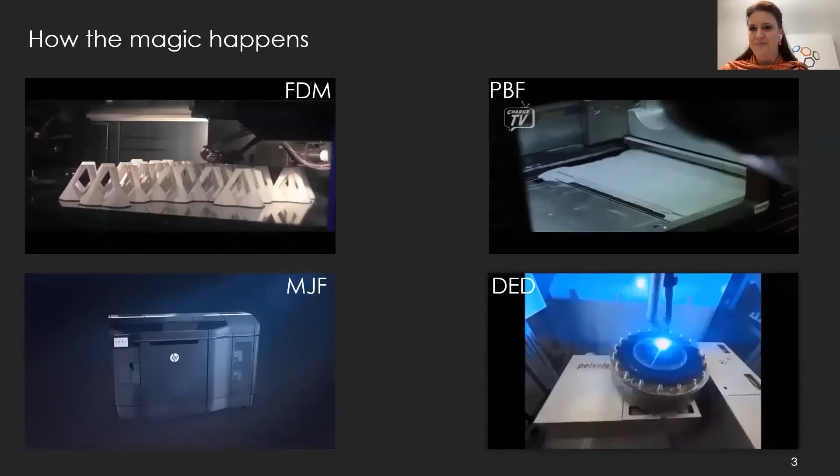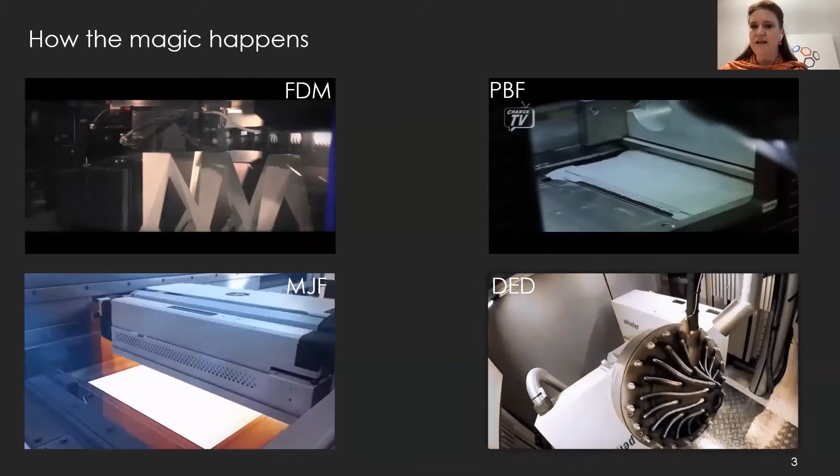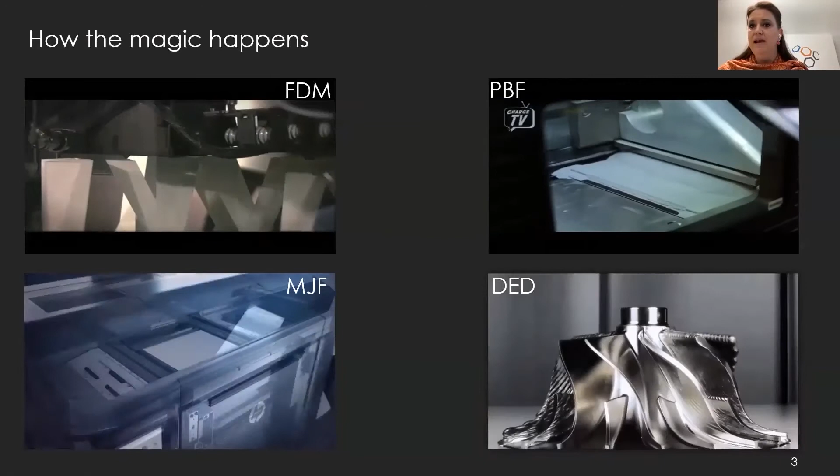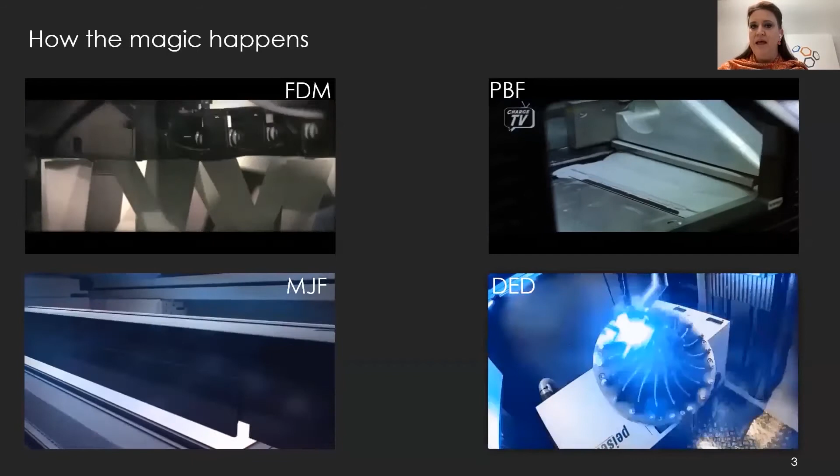So what you can see here are the most common ones which are used, for instance, in mobility. You have the FDM technology - that is what you for sure will know, you might have seen that. Those are also the desktop printers which can print plastic parts made from a plastic cable which is heated. You always, in all those technologies, have a layer-by-layer structure, so you can produce things absolutely differently compared to former technologies like, for instance, casting. What you can see here are just some examples, but it gives you a very big freedom of design.

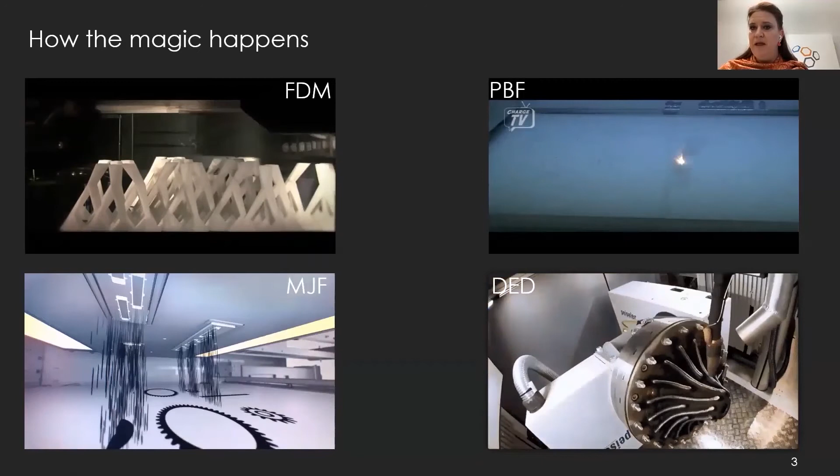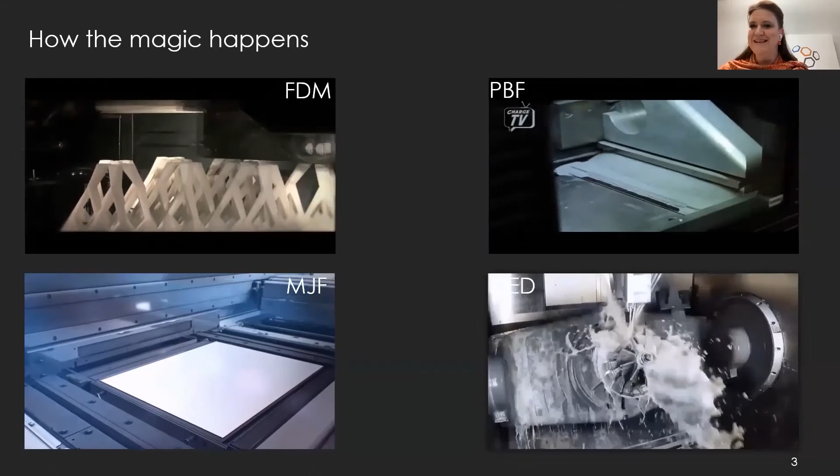What you can see next to it, the PBF, is the abbreviation for Powder Bed Fusion. That's a technology which is used with powders, as the name already says. And there you can see it - you have a very thin layer, just one hair's thickness thick.

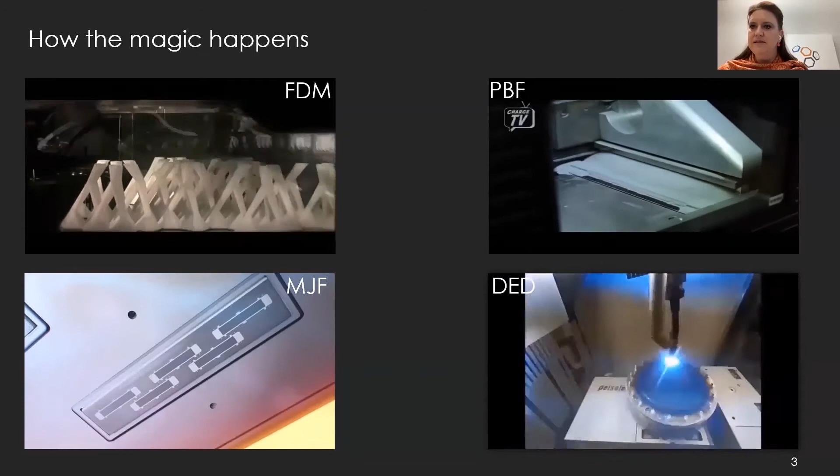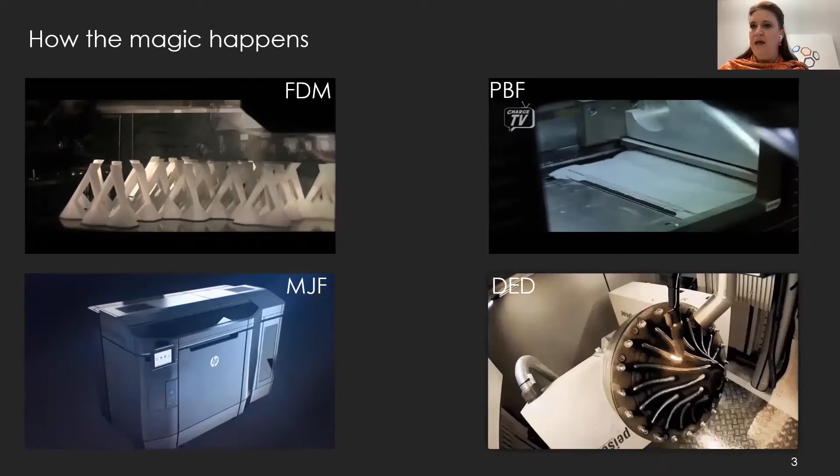That is sintered by lasers, and you can use different kinds of powders. That could be plastic powders, but it also could be metal powders. What you can achieve is a very good structure and very high density of parts, and also very good surface.

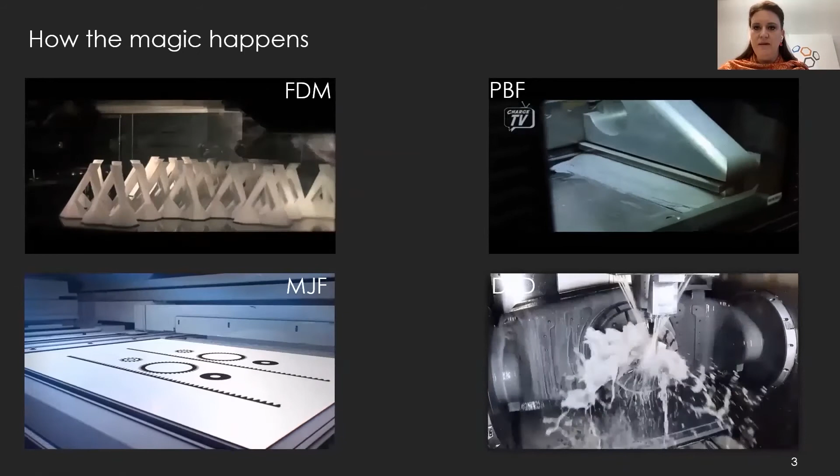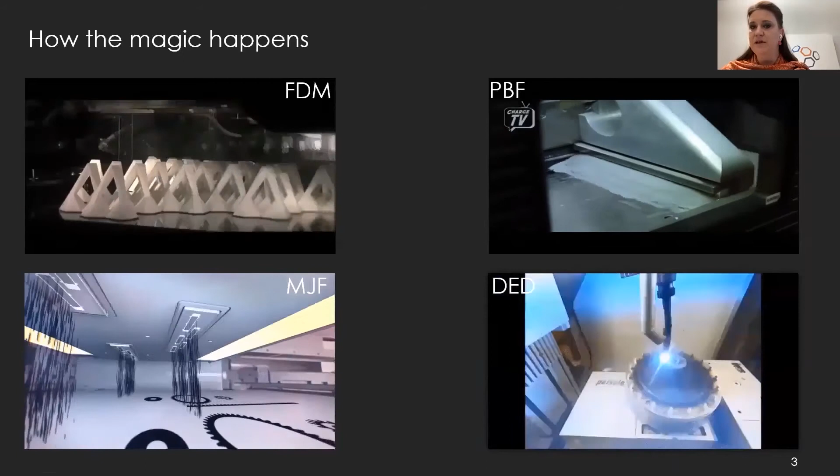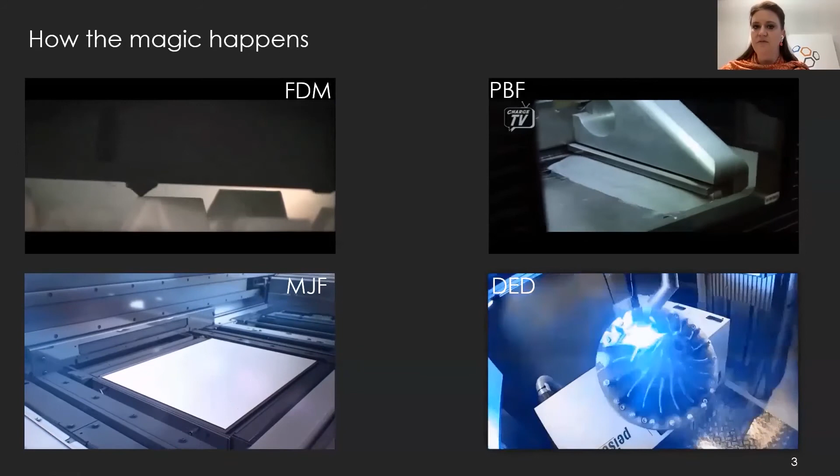What you can see with the MJF abbreviation is the multi-jet fusion. That's a technology which was invented a couple of years ago by HP. The logic is a bit like 2D printing, and there you also use powders, but no lasers. So it's much cheaper, and it's also much faster.

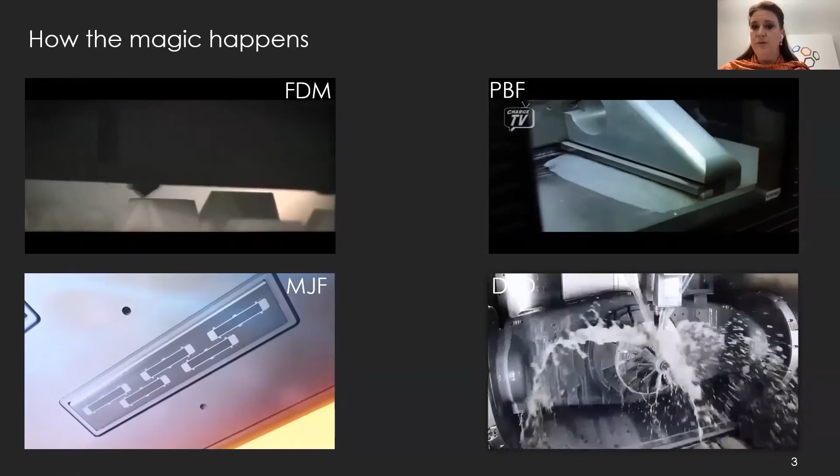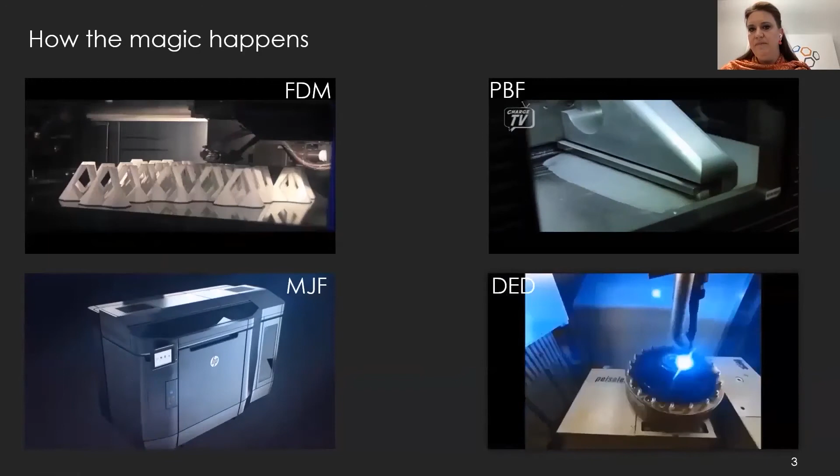And the things you can produce with that technology are by now mainly plastic parts, but they are also working on metal parts. You have two different liquids which are brought into the powder, which you can see right now. And those liquids are also hardened with a special kind of light.

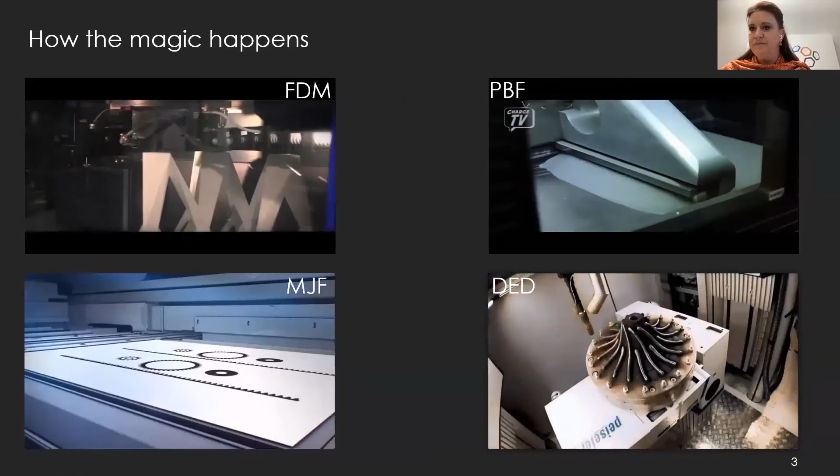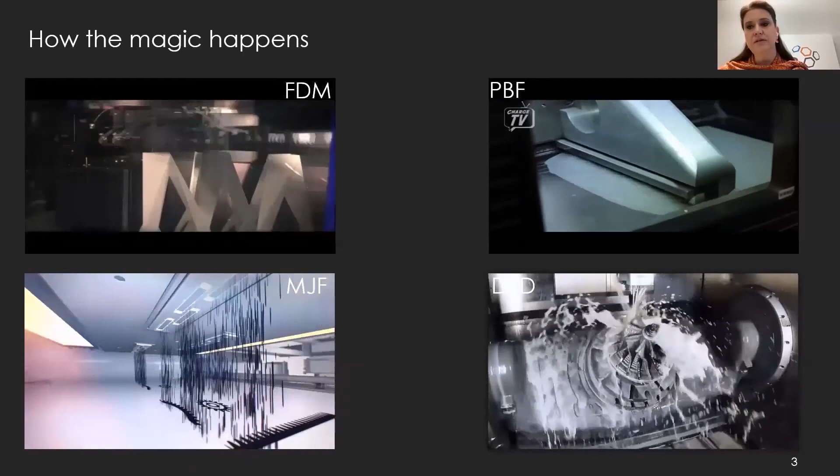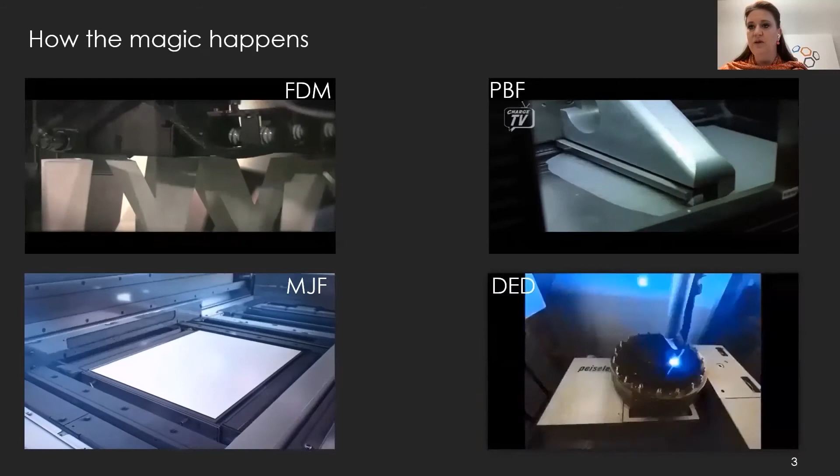And then you see the DED technology, that's the directed energy deposition. That can be used for huge metal parts. That is a technology which is not too old, just a couple of years old, but very, very interesting when it comes to big metal parts. Because if you want to print those huge metal parts in the powder bed technology, it will take you a very, very long time, and it will be quite expensive.

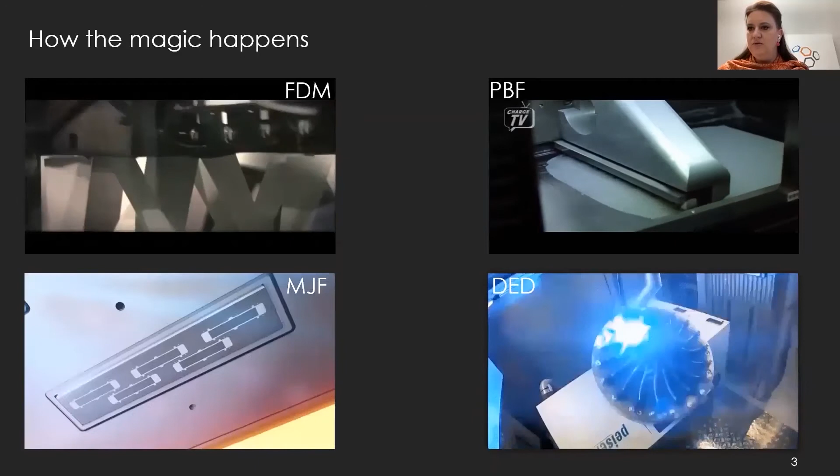So with DED, you use a metal wire, and you use an arc, and with that the part is melted, which you can see over here. The surfaces are very rough, so you have to post-treat it definitely.

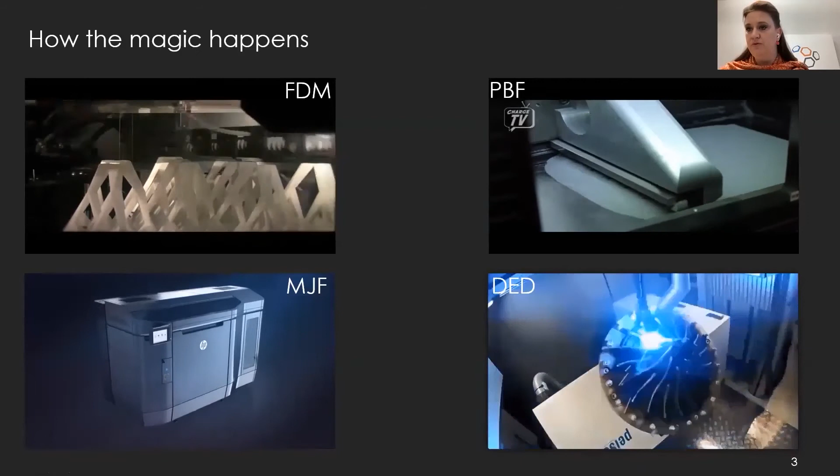So coming to the next slide, here you can see the principle of what you can do. So to think additive with this additive design, here's the difference coming from an original design.

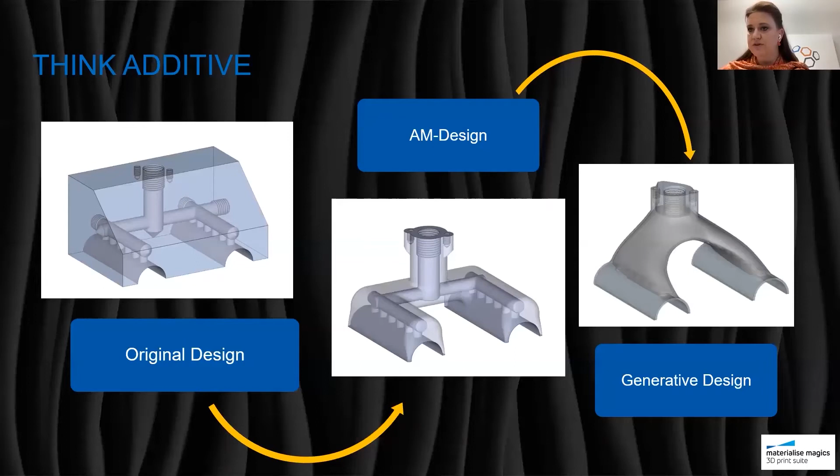This is just an example of certain grippers. And then you can reduce the part. Yeah, you can reduce it by size, by material, and you can even optimize it. So afterwards, with the generative design, which is the 3D printing design, you don't have any assembling anymore, which saves a lot of costs and maintenance and assembling, of course.

So next slide. If you take a closer look at those technologies, it's really interesting that the industrial part of additive manufacturing is mainly located in Europe. So you will have a lot of brilliant desktop printers coming from the United States and also other countries. But if it comes to industrial printers, that's mainly Europe.

And here we are really specialized on approved parts, which means highly regulated sectors use additive manufacturing already, sometimes even for a very long time. For instance, the aviation industry. The aviation industry uses additive manufacturing to save weight.

They have a very simple logic. If they can save 1 kilogram during a life cycle of 25 years of an average plane, they save 10,000 euros. So you can take a look at the costs of additive manufacturing, which are usually definitely higher than the former technologies, but in that case, it really makes sense. And lightweight is the task for aviation in AM.

The shipping industry uses also additive manufacturing. I'll come back to that later. And the armies do too. All of them have a different perspective on additive manufacturing, which is always really interesting because every niche tries to find the perfect use case, as well as automotive and medical.

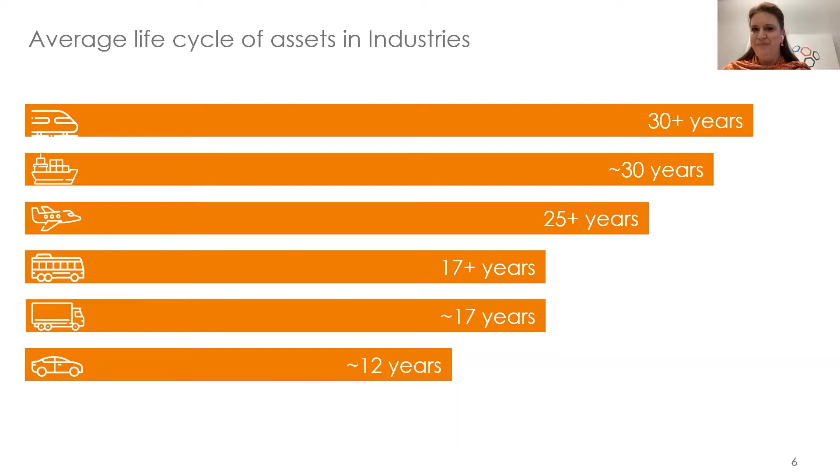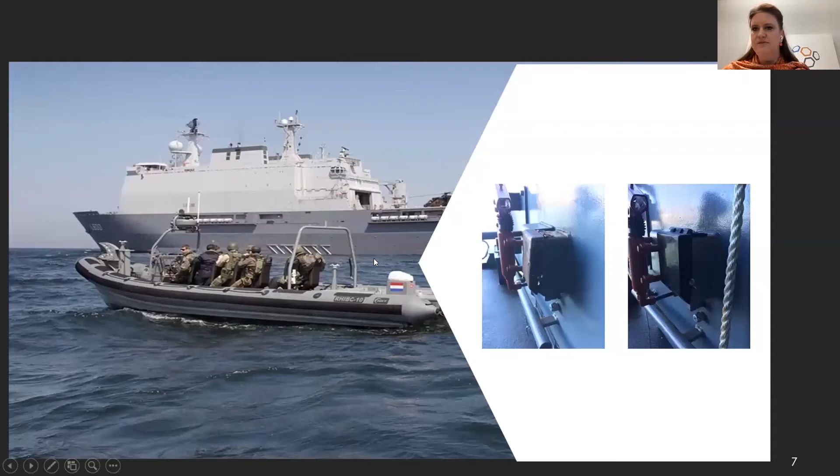And what I really love is the logic of homecomers. So homecomers are used as interim spare parts, and when they come to their harbor, then they replace the spare part again. So it's not really a lightweight case, but still very interesting when it comes to the logic and perspective.

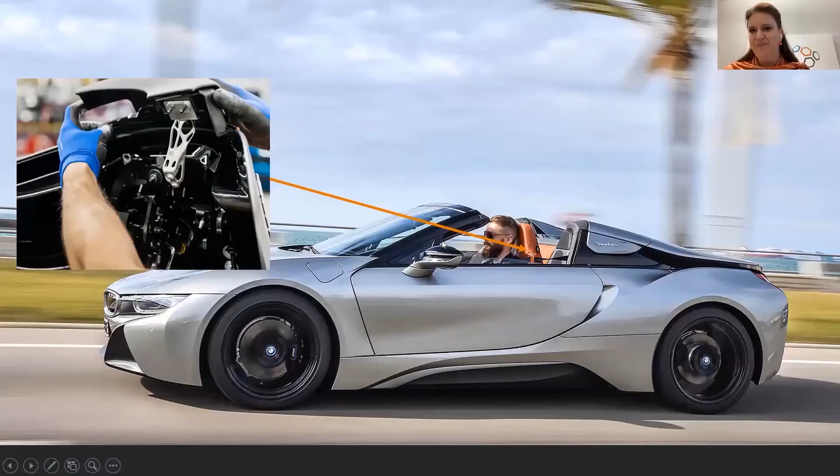Automotive has used additive manufacturing for more than 25, 30 years. Usually they use it for prototyping of different parts in cars, and to be much faster in the design period of a car. But now, from time to time, you see more parts which really stay in a series car. And what you can see here is one of those parts.

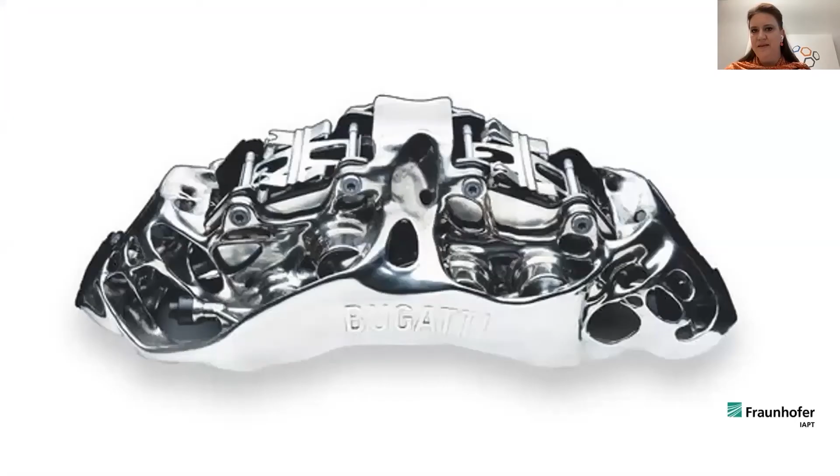You can also see the bionic design, and that is used for the roof of that cabrio. A very beautiful part. You can even use it as a design object for your living room. But in fact, it's a braking caliper from a Bugatti, and that is printed from titanium. Therefore, the powder bed technology was used, and it also saves weight.

And what is even more interesting, also the assembling. They were able to reduce the parts a lot. So the assembling is less time consuming, less complicated, and therefore also maintenance.

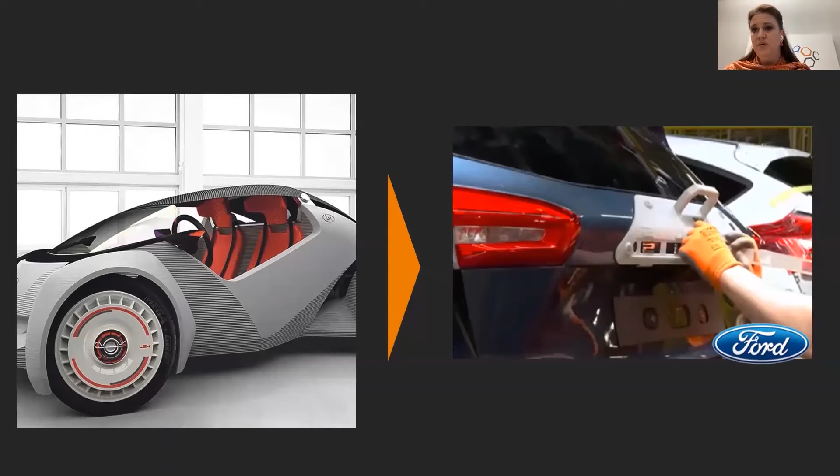As I already said, additive manufacturing used to be the technology for prototypes, or also for concept cars. What is now the case is that the automotive companies, in this case Ford, use desktop printers to print jigs and fixtures, which is really interesting because they are very flexible. Those printers are not very expensive. And also here, lightweight plays a role, which you can see on the next slide.

And furthermore, as I explained before, the surfaces of those parts are quite rough. And that is a huge advantage in medical because of the roughness of the surfaces, it can be integrated much better, so the bone can grow and integrate in that printed part. So the part is better accepted by the body.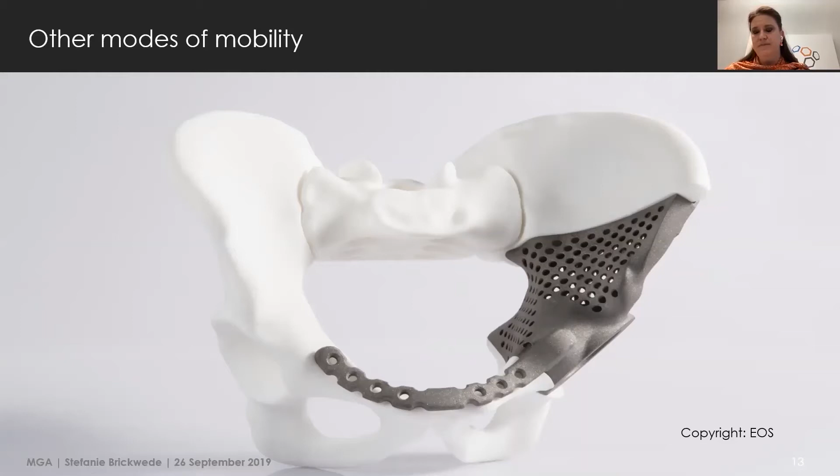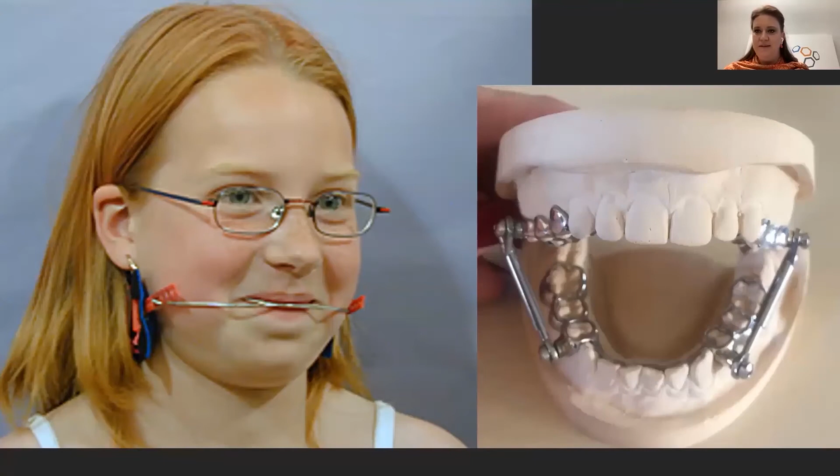Yeah, you might have had some classmates who had the nuisance to have to look like that. So braces to straighten the teeth used to look like that. With additive manufacturing, they now look like that. So they were able, it's a company coming from Bremen in Germany, to integrate this into the mouth, which really looks much better. So it's not a nuisance anymore. So you see there are many, many different kinds where additive manufacturing can be used.

And here you can see even more. So those are different use cases in medical. Often, coming from the lower complexity, they are used for spare parts for machines like X-rays and other things. Then it's also used for very simple, easy to print parts in regions where it's hard to get any parts at all, like Africa or also refugee camps.

You can see implants for the body, for the head, and many surgeons also use additive manufacturing for printing models before a very complicated, for instance, heart or cancer surgery to be optimally prepared. How is the tumor located and how to cope with that.

Then you can see orthoses, prostheses, and that looks a bit cyborg-like, but it's really a great advantage for people who have lost a leg or an arm, because now those are really printed individually for those people and can also be replaced quite easily.

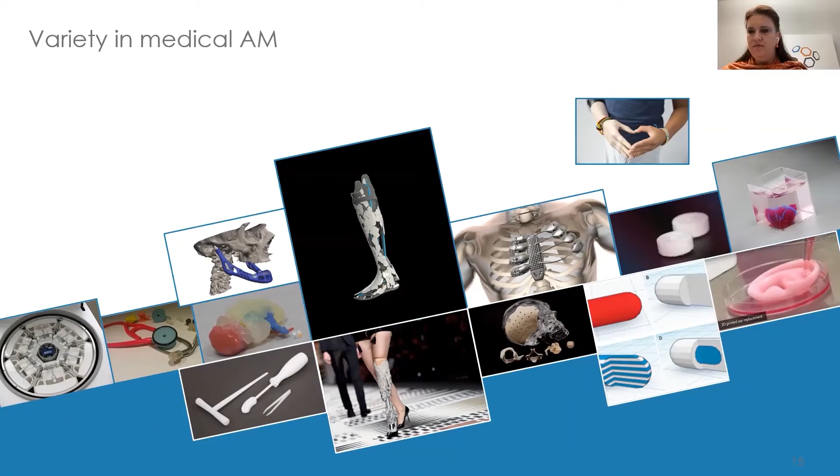Israel. Very interesting case. So bioprinting is absolutely increasing, and also in Berlin, for instance, organs are printed, not to be implanted in the first step, but to be used for trials of medical surgeries and also medicine, for instance. So you don't need that many animal tests.

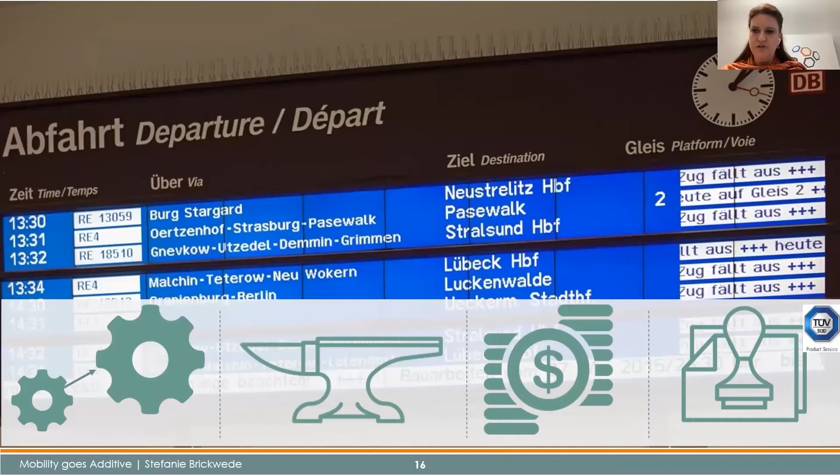Coming to the rail, it tries to be more in time with using additive manufacturing. So it's, as I said, a bit of a different use case. And that means we need big parts, we need ideally an equivalent to welded parts. We need very cost-efficient production and also always the approval of those parts. So what you can see here has nothing to do with lightweight, but I wanted to show it to you because we are really proud of that part.

That's a part made of 27 kilograms of stainless steel used for a high-speed train, which goes 350 kilometers an hour. So that's a safety relevant part. And that part was missing. And the 35 million euro expensive train had a standstill of, I guess, 9 months. And the colleagues from the procurement department asked for help, and they couldn't get the part in the markets anymore.

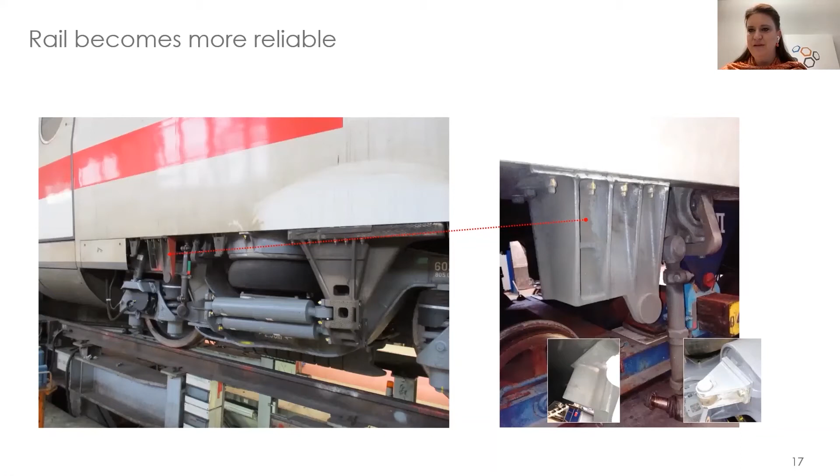So that was the perfect situation for additive manufacturing, and therefore, as you can see on the next slides, we used the DED. But of course, since this is a safety relevant part, we had to take a very close look that everything is fine, that the quality levels and the density levels are fulfilled for this part.

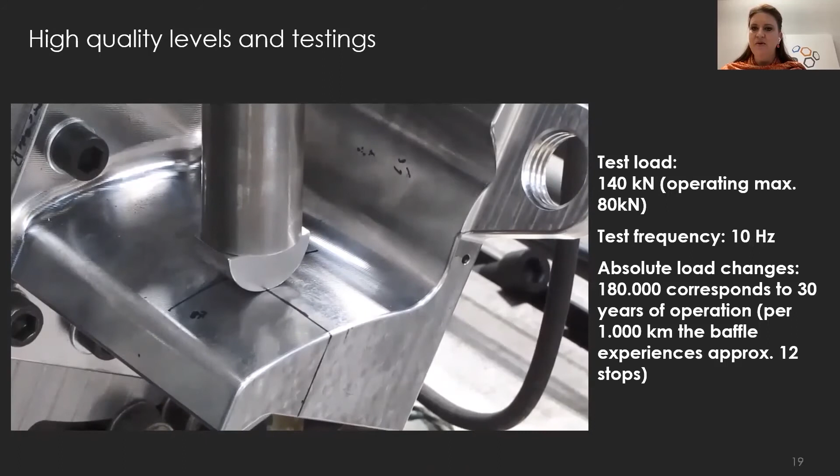And here you can see a little movie from a test stand, how we test those parts, so that you have an idea, because that part prevents the train from getting too much into the curves. So of course that has to be tested with a very, very high test frequency. And we had a load change which corresponds to 30 years of operation. But we just needed the part for 7 more years of operation. So now we are absolutely sure that that part will meet the quality levels.

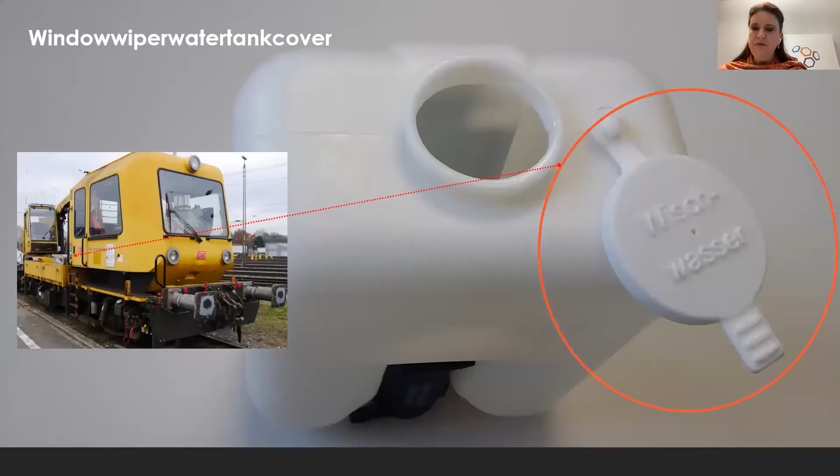But you can also use additive manufacturing for smaller parts. And I love those words in rail. It's window wiper water tank cover. For instance, just one part of a component, and that was missing. But since the window wipers are crucial for rail, because they also have to be able to see where they are going, that is really also a very relevant part. And now we don't have to exchange the whole water tank anymore. We just can print the tank cover and everything's fine.

Usually, if it comes to rail, we are looking for a one-to-one exchange. So a one-to-one replacement of parts we can't get anymore at the market. So usually we are looking for those parts because then form, fit, function is identical, and it's quite easy to get the certification.

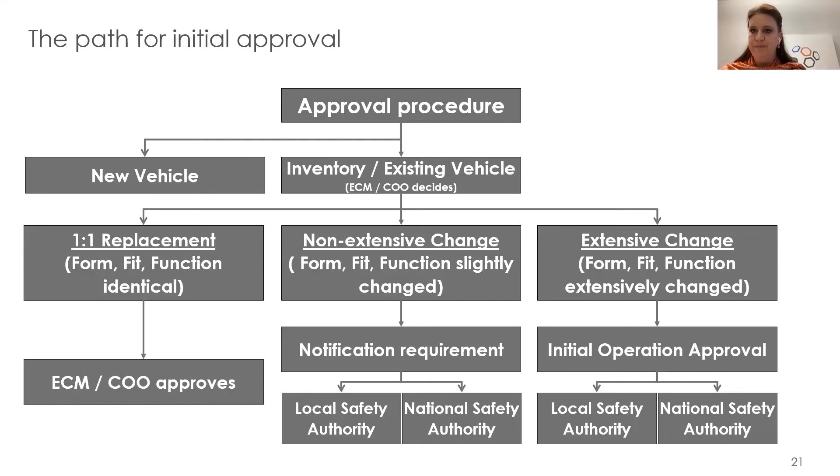So the first companies in Europe, like the Dutch colleagues, are now thinking about how to integrate additive manufacturing in the procurement process at the very beginning of the life cycle, and not just at the end, which is what we mainly used to do. And now it's really getting very interesting, because now we can also save weight in rail. This is just a tiny example of what you can do.

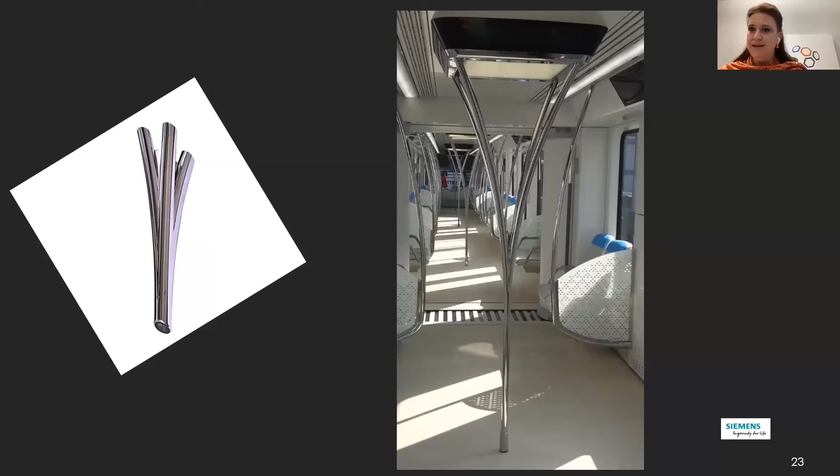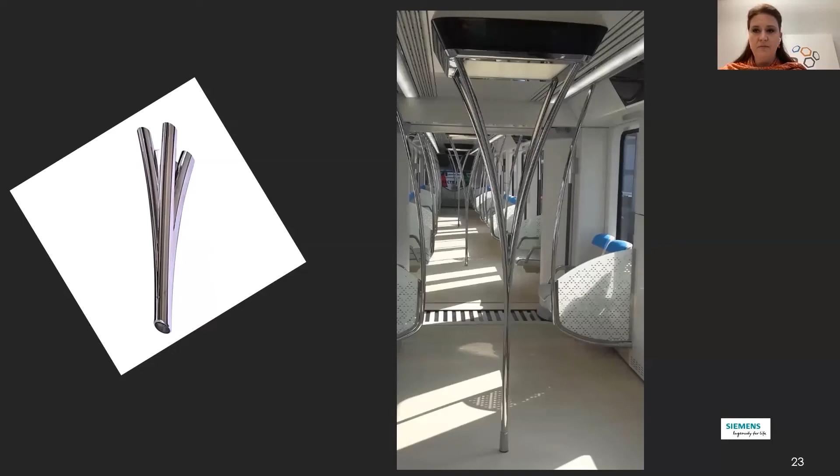So coming from left to right, this part, it's a holder for a regional train, was weight optimized by Siemens. And here you can also see what it looks like afterwards. And so they were able to save 70% of the weight. Even if it doesn't look like that, that's also a very beautiful example. It's a palm tree handle, so-called because it looks like a palm tree, from a metro in Riyadh. And that was also printed and weight reduced, also by approximately 70%, which is really attractive, because then you save weight for the operation and emissions and so on.

But furthermore, you also save material, which is very attractive in the powder bed fusion technologies. And that's an example for that, because then you don't have to melt that much material. So the whole production is much cheaper and also faster.

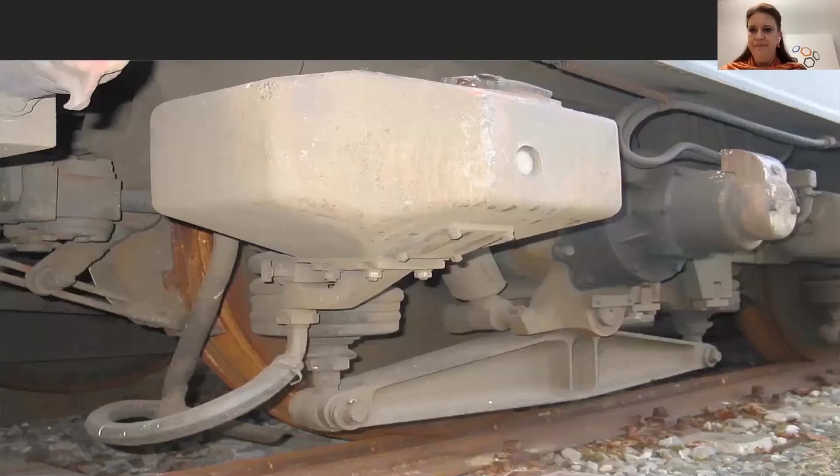And here's just a short summary where additive manufacturing can make sense. You have a higher availability of parts. You can substitute just parts of components. You have a solution for your obsolescence problems at the end of the life cycle. You can do functional integration, so functions which couldn't be integrated before are now possible.

And you can even produce from lot size 1 on, which is really attractive: small numbers, parts you can't get anymore, and now you're so flexible and can reproduce those. Savings in manufacturing costs can be achieved too. That is an example of handrail signs for blind people.

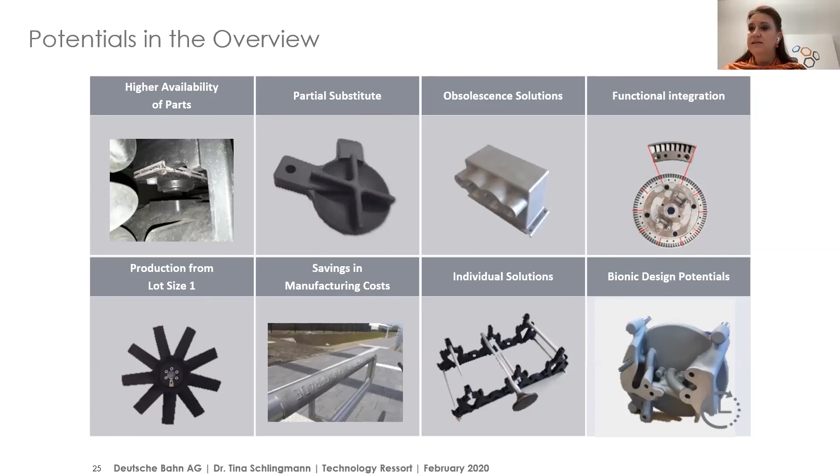And you can create individual solutions like specific holders, in that case for inlet valves, for instance, designed by colleagues in maintenance. And of course, for lightweight, bionic design potentials are huge. And that is really a very interesting approach where you can save weight, you can save material. So that means it's also a very green technology.

If you take a look into the future, what's the next big thing? We are already busy looking into the future. And what is it? It's printing with, next slide please, concrete. And that is really interesting because now you can have very flexible structures. In that case, it's stairways for the Dutch railways.

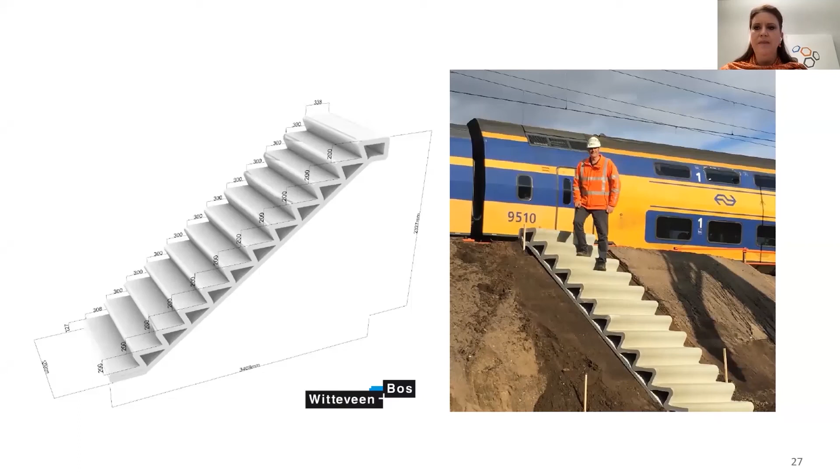And usually you need a lot of formwork for stairs. That is not necessary anymore. So you save a lot of material and time and costs. So in the next 2.5 years, we will see a lot of changes. How do you get started if you want to start with that technology?

We founded a network which is called MGA, which stands for Mobility Goes Additive. And what you can see here are all those users coming from different countries throughout Europe. You have all the big printing service bureaus. You have a lot of universities and consultancies which already work with the technology. Then you have the material providers.

You have the software companies, which is definitely crucial because before a CAD design and also for the optimization, you need brilliant software. And you have a lot of machine producers for different technologies, different sizes, different materials. So we founded MGA 3 years ago with 9 founding partners, and now we are 120.

And what we take care of are exactly those subjects which one company can't solve on its own. For instance, approval. If you do this in a joint approach and address the authorities together with suppliers, OEMs, and operators, that is brilliant and also saves a lot of costs.

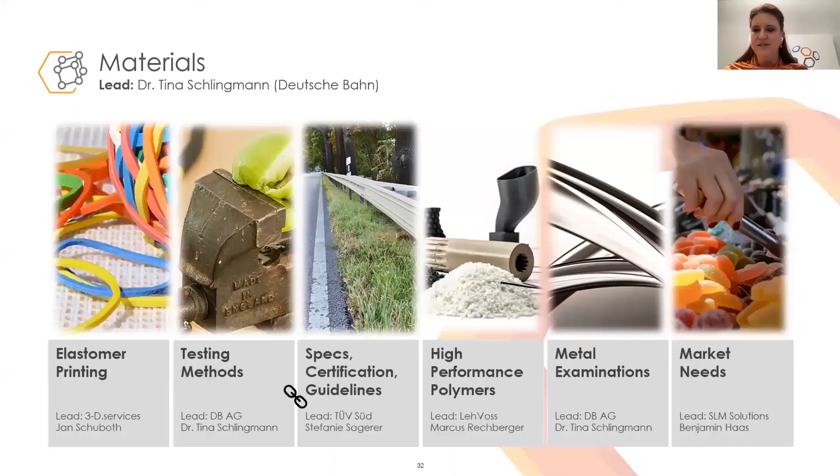Within those working groups, we take care of materials, of use cases, of approval. That, for instance, is the structure of our materials working group. And next slide.

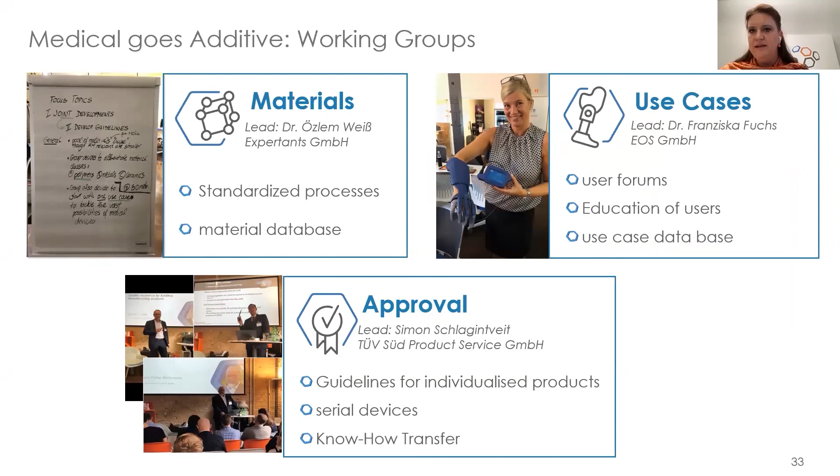Of course, we always have to take care of setting standards, because I'm always asked, how do you cope with the approval of those safety-relevant spare parts, especially in rail, but also in medical? And of course, you need to prove that form, fit, function is the same, or meets the quality levels and norms. And therefore, we tried to set a standard in cooperation with TÜV Süd. And you have a lot of printing service bureaus which are already approved by that now.

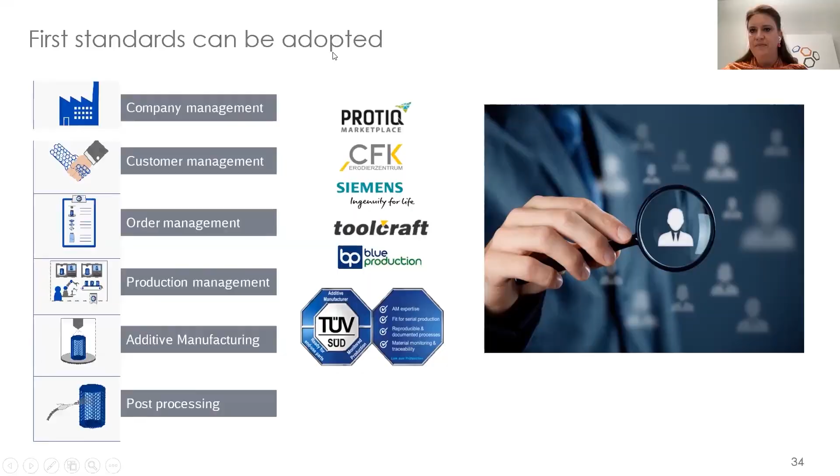What are our next goals within the network? We try to establish an industrial additive manufacturing hub here in Berlin. And many companies come to Berlin to get informed about potential technologies, use cases, and so on. And many company leaders come to me and say, now I've understood that additive manufacturing is the future technology. I want to buy a machine, and which one should I buy?

And usually we say, before you buy a machine, and we are talking about costs in the industrial part of the technology of at least 500,000 euros, you have to take a closer look at what you want to do with that. What are the main use cases? What technology is suitable for that? And therefore, we want to give room also for companies which would like to come together and talk about those use cases.

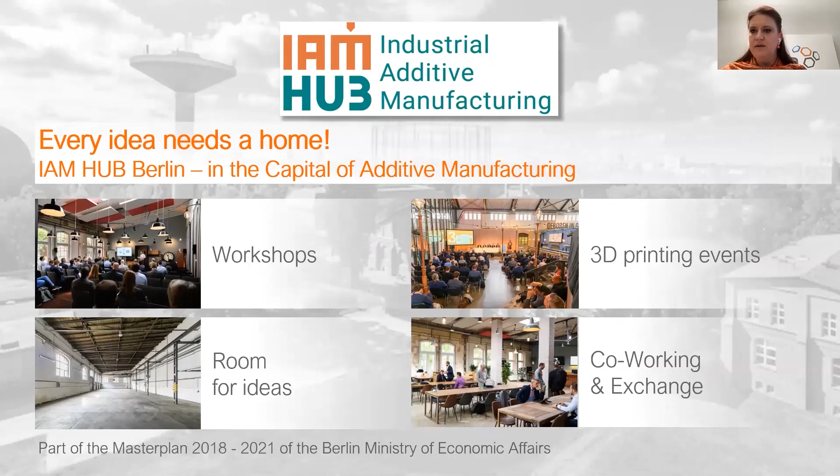We've learned a lot from other companies because the aviation industry, for instance, had a lot of experience, and we really took a lot of advantage out of that knowledge exchange. And therefore, we also have an annual meeting for our members that will take place in person, hopefully in October in Berlin.